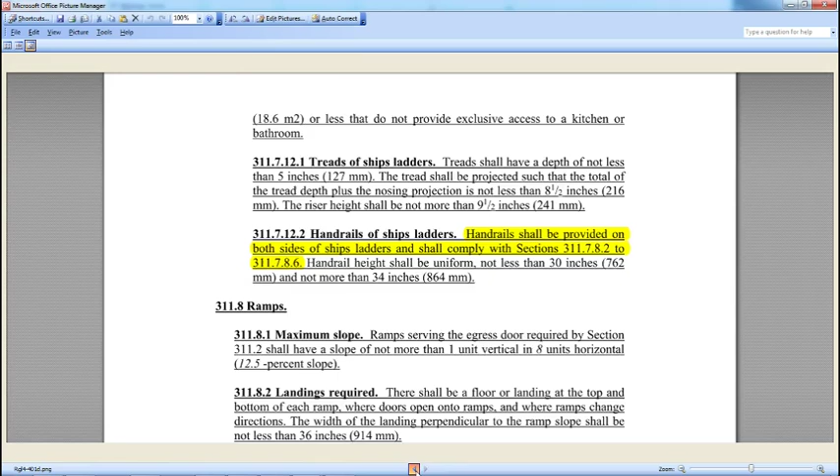And then it also becomes a case of, can your furnace equipment fit, because if it's wider than 20 inches, it's not going to fit down there. So that furnace equipment would almost have to be specified before any kind of a call was made on whether that stairwell is modified at all.

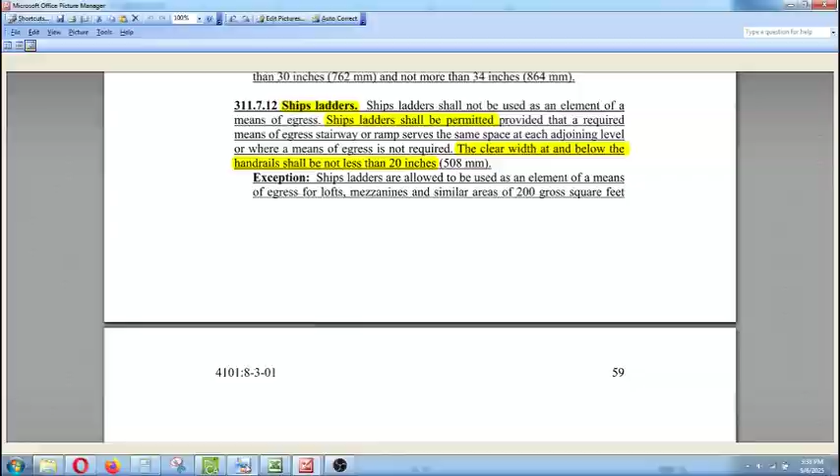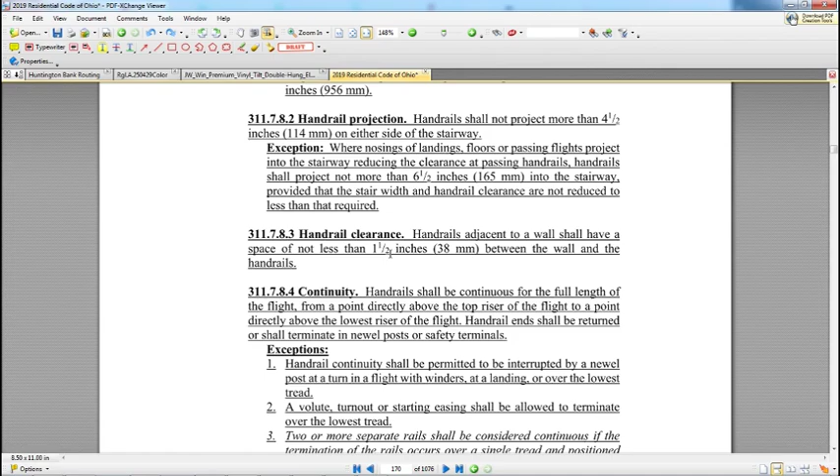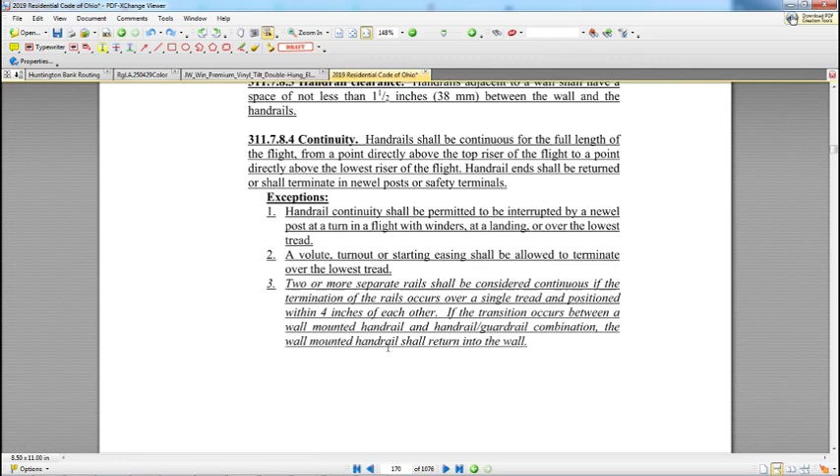Because if we use one of these ship's ladders, and we take that 20-inch minimum width between the handrails, the handrails need 1.5 inches between them and any walls they go in front of. But the handrails themselves can be 2x2s. So you've got 20-inch width between the handrails, and then the 2x2 on each side, because they want them on both sides, bringing it to 23, plus the 1.5 inch clearance at the wall.

So the upshot of all that means you can accomplish this stairwell down here as a ship's ladder, presumably - I'm going to model that in a minute and see - in about 26 inches of space. Currently we're using quite a bit more than that, about 37, so there's almost a foot to be gained if there's not a lot of heavy travel to the basement. Presumably the things in the basement would be the water heater, the gas meter, and the furnace.

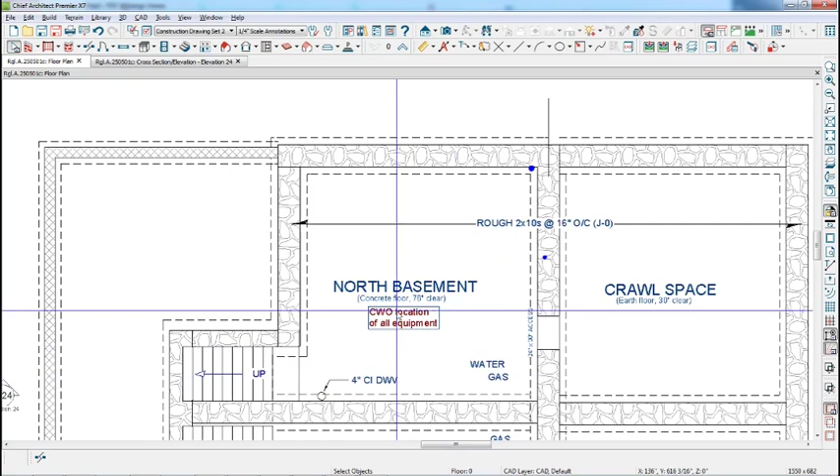Because I would think that we would have the electric panels up here somewhere. So I want to think about that. I'll be working with this existing thing first, because I'm not sure that the ship's ladder will give us an advantage, but I wanted to look at that going in.

But that was yesterday, and then the rest of this film will be the development of this area and anything associated with it. We wanted to look at development in that basement in the event that we did have ship's ladder stairs coming down. Apparently this is when I did this, which was still yesterday, considering what kind of access we're going to need to that basement and what kind of equipment you're going to have in the basement.

These red things were our mechanical chase availabilities, and that's where they were down here. So because of the plumbing, that one gets readjusted, and we have the gas meter down there, and the access is actually there, so that one actually gets readjusted as well, and those two up there get skinnied down as well. So that's our remaining available chases to the second floor, something like that.

I mean, they're full size up in here, it's a full 10 inches up in here, but there's probably a choke point of 8 inches downstairs.

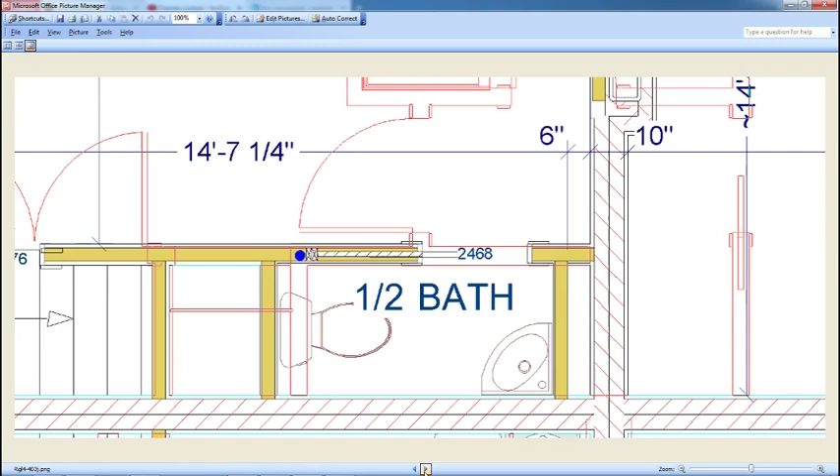So it's that side or nothing. I pushed it that way and ate up some more of that mechanical space. So upstairs, these 30-inch shelves were preserved, and that's about the only available pathway for that to get up to the roof, for that vent, for that first floor toilet to get up to the roof.

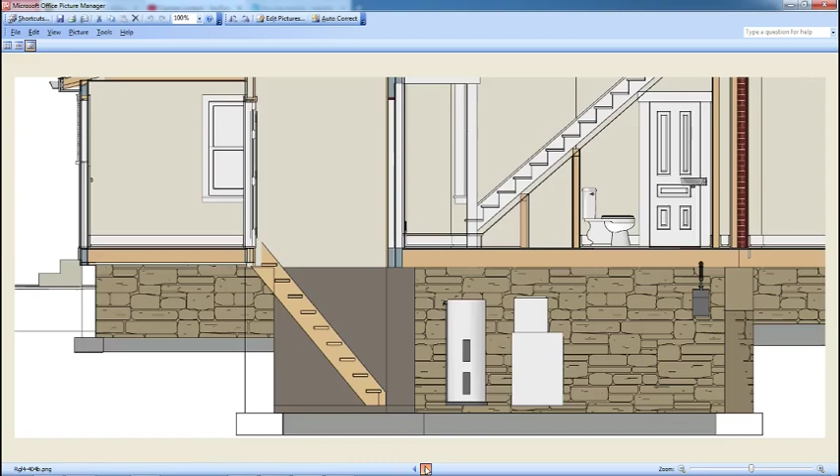But that probably won't matter down the road. That's already a ship's ladder more or less, and we're not going to really be able to improve on that and help ourselves too much at the first floor. But you do notice that this door here, this wall, looks to me like it could move forward some.

But leaving that aside for a moment and looking at this first floor, beginning to look at the area that exists without paying attention to that, because as I said, I would see what we could do with that in its place.

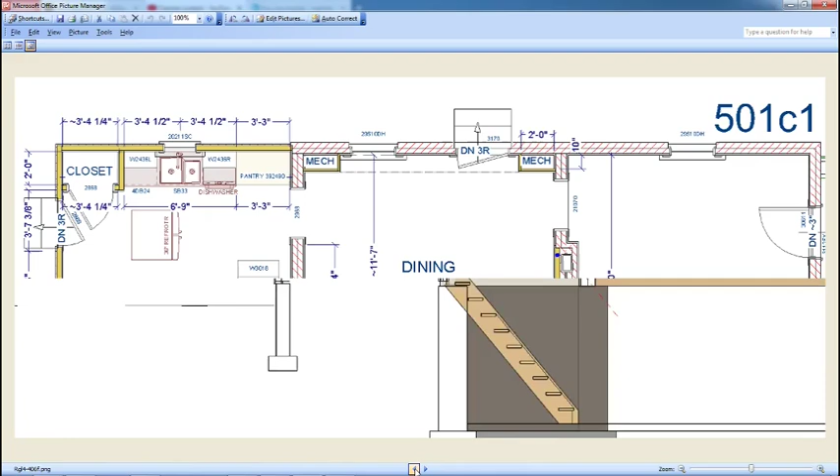But because I was already at a pinch point, then I looked at that wall again, whether that could be moved forward. Well, I know it can. So I moved it forward about 4 inches, and we ended up with that. And then I made it 30 inches wide.

But then I knew that I wanted to gain some space, and I felt like this was expendable space here. So I dropped that wall down, and again, worked with this laundry machines over here. And that wasn't so right.

So I started by saying, okay, I'm not sure about that closet up there. And we go to plan C2. The closet, and I think, well, maybe the refrigerator goes up behind the door. I'm not too keen on that either. So you can just see kind of what is happening as I go along here.

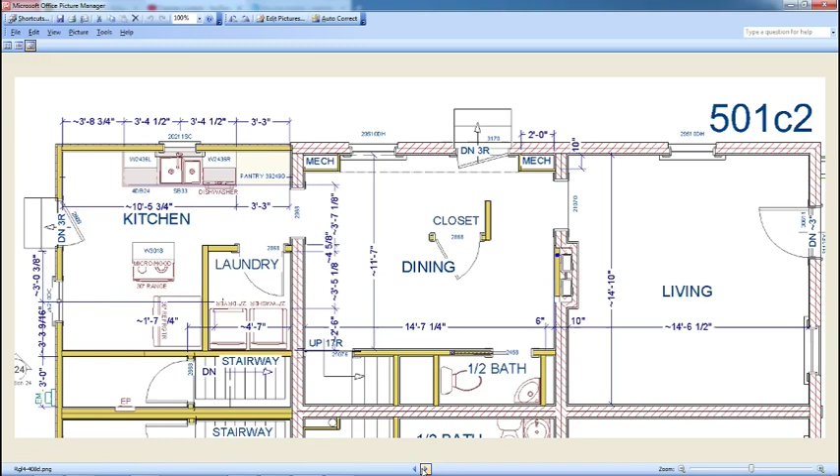This refrigerator, I put panels on the side of it with this cabinet over, 18-inch high by 24-inch deep cabinet over. That's how I treated that. I really maximized a lot of cabinetry in here, I confess. Some of that can go away, I suppose. But right now I have a full depth cabinet over that refrigerator.

And what was missing from down here really is counter space, more than anything. This is good for cleanup and all that, and this is good cooking space here. But we need some wide drawers or something to hold pots and pans. So I put a 30-inch cabinet in beside that refrigerator, standard 24-inch depth.

Then I needed to push that over some, so I finally relented and got away from this 28-inch wide door and went to a 24-inch wide closet there, because we have kind of an overflow closet here for brooms and whatnot on this little landing area before you go down the stairs. So I took that down to a 24-inch door so that I get that refrigerator more toward the center of that kitchen.

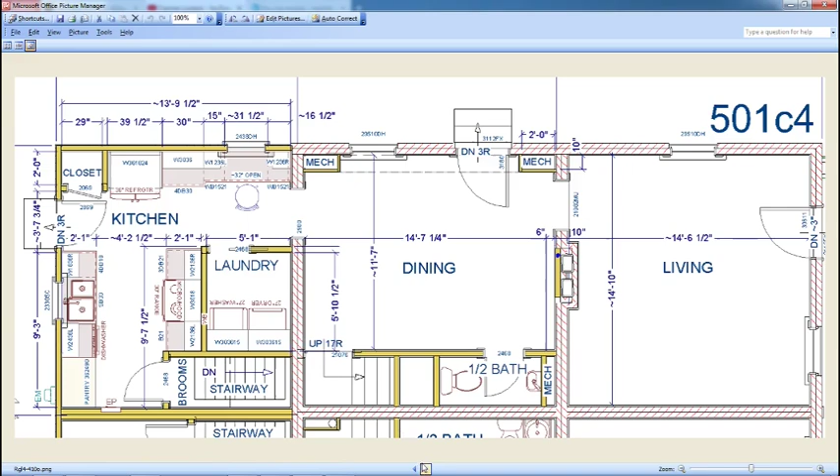And I believe that's how that finishes out. These were the elevations at a certain point - maybe there's a few little changes after that. But that kitchen ceiling is just a little bit more than maybe 91 inches, maybe 91.5 inches. So a 90-inch kitchen would do it with whatever sort of trim you want to use.

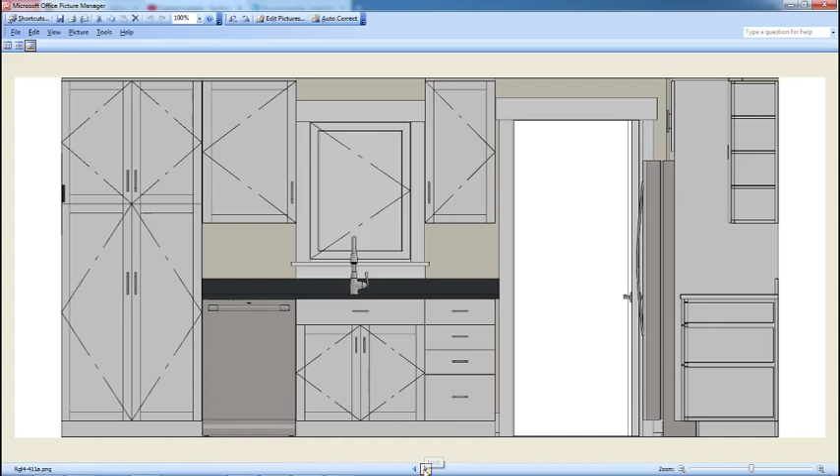And we just have this one tall cabinet here, so it's not out of the realm that all of this cabinetry could be just pushed up to the ceiling. I'm showing a little piece of trim at the top, but it's possible that's all just pushed to the ceiling, because that ceiling should be pretty flat.

And there might be an argument, by the way, for this - everything that happens on the first floor - and I think there is a good argument, I think this should be done: all these lintels on the first floor anyway should be made like these, where it's trimmed off like that, peaked to match the rest of the first floor.

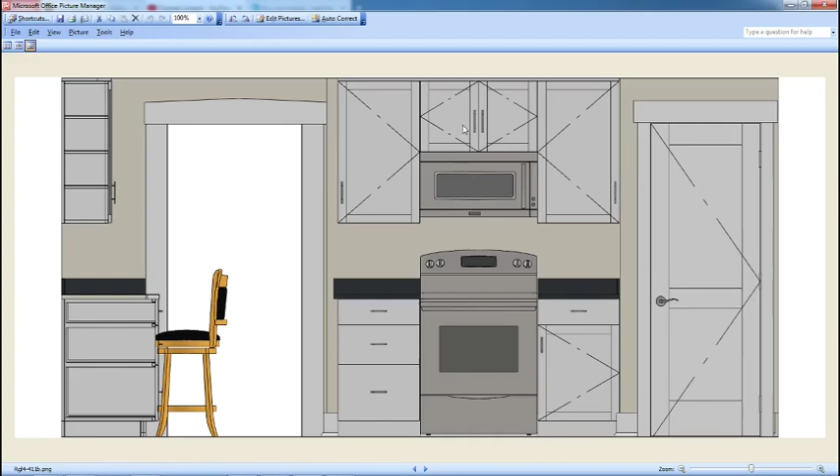This is looking at that wall with the door to the little closet. And that was before I added those, and they don't need to be added because people could put any kind of art here - anything can happen here. So these two are just extra kind of cabinets there, aren't really needed.

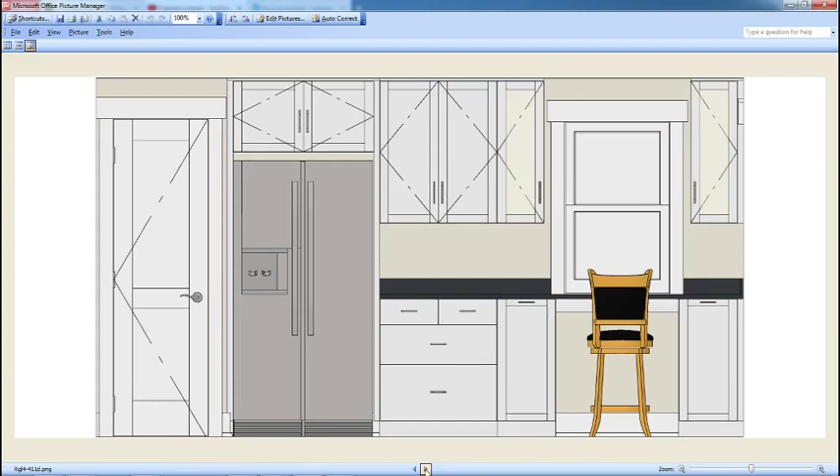And this is the boring elevation. This was before I moved that to a pocket door, so this became a more slender pocket door, so there's a lot more wall space here in terms of art. And a person has to decide where they want to put this panel.

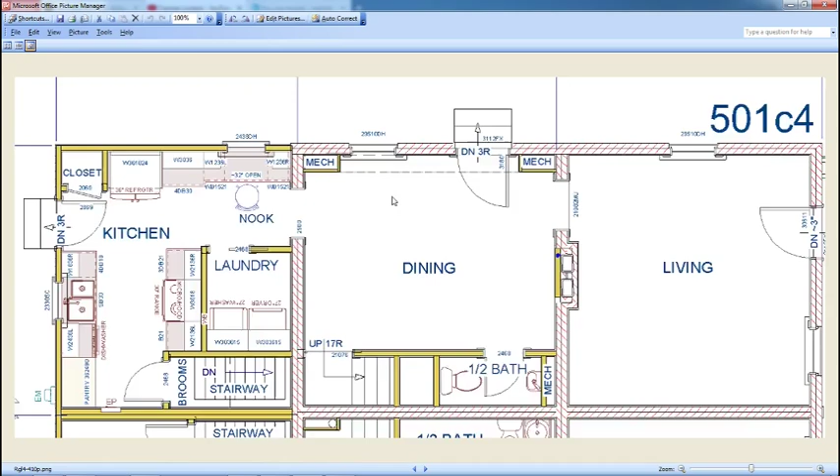In this final analysis, it's not going to be close enough - they might allow you to put that electric panel just inside here, which is definitely what I would prefer, and we could see what the limit is. I think it's 6 feet inside the house, and we have 2 feet, and we know this is 4'2", so we're about 6 right here. So I don't know if they'll let you go 7 and have it there, or whether it's going to be out here somewhere. That is that, and this will be a walkthrough of both those floors as they exist now.

The development yesterday, changing up on the second floor yesterday, and this development on the first floor today.